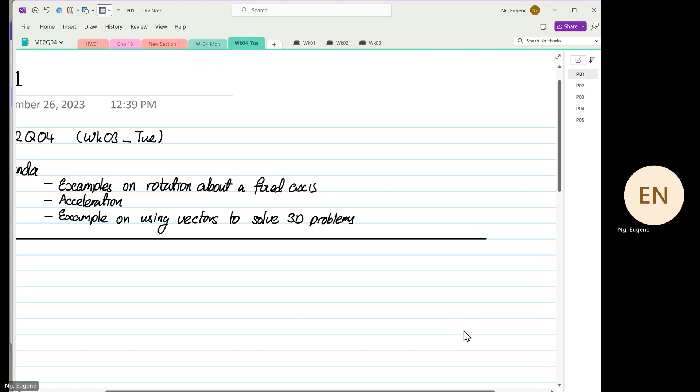And a quick reminder that your term test 1 will be held on October 2nd. It will start at 7 p.m. and end at 9:30 p.m. You're going to have 3 questions. I will notify you about your seating arrangement on Friday, which room you should go to.

3 questions, and they are from the lecture. Okay, so you need to know the lecture notes from lectures, and homework 01, homework 02, and homework 03. You should be capable of doing all this homework without any problem. Okay, yes. Yep. Homework 3 is also involved. Okay. I can add in some more formulas for what I teach this week.

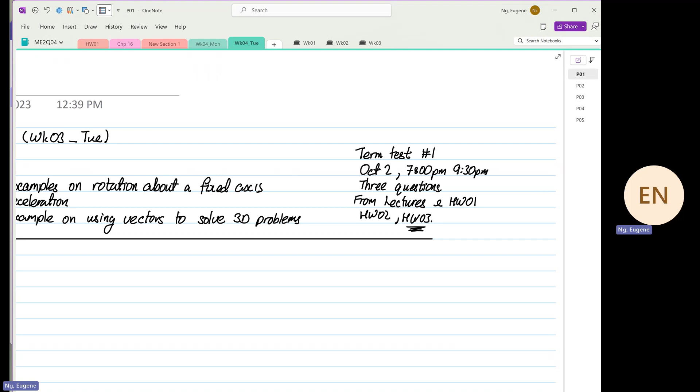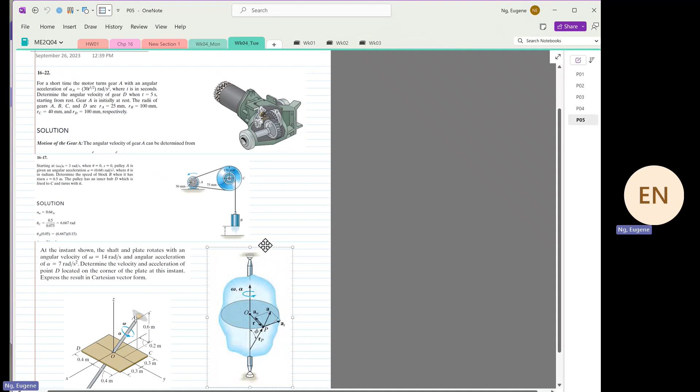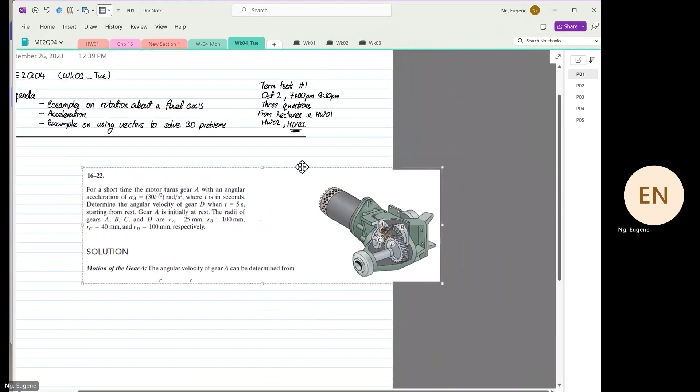Right. So we are going to look at another example, and they are posted on Avenue to Learn. So this is the next example that we'd like to do. This example is different from the previous one because I selected it since there are more gears. But more gears does not mean more difficult. Not necessarily true. Right, let's see what we have. Okay.

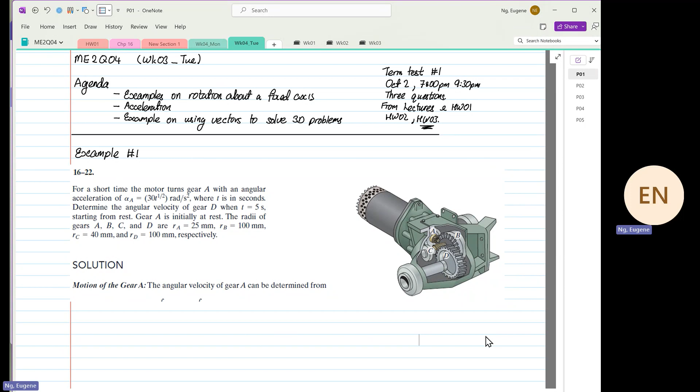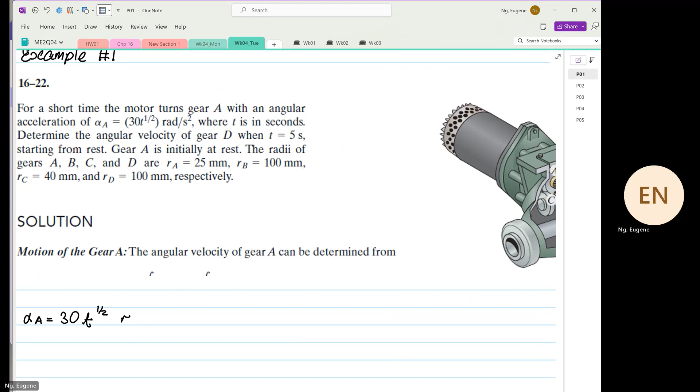So we have a short-time motor turning gear A, right? You see gear A down here in the diagram with an angular acceleration. So we know that alpha A is equal to 30 T to the power of half radians per second squared, where T is in seconds. We have to determine the angular velocity of gear D. Okay, we have to find omega D.

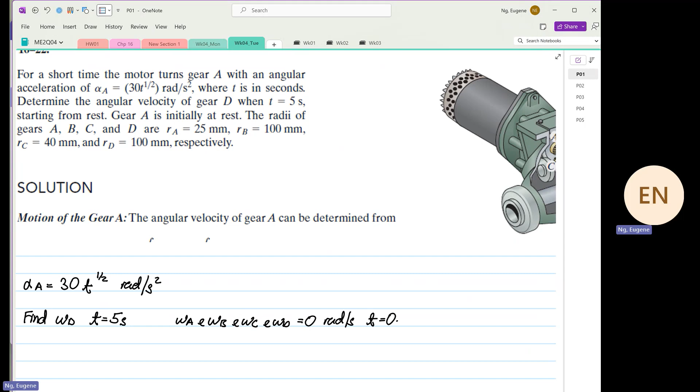We have to find omega D when T is 5 seconds, and we know that omega A, omega B, omega C, omega D are equal to 0 radians per second when time is equal to 0. Furthermore, we are given the radii. The radius of A is 0.025 meters. Radius of B is equal to 0.1 meter. Radius of C equal to 0.04 meters. And radius of D is equal to 0.1 meter.

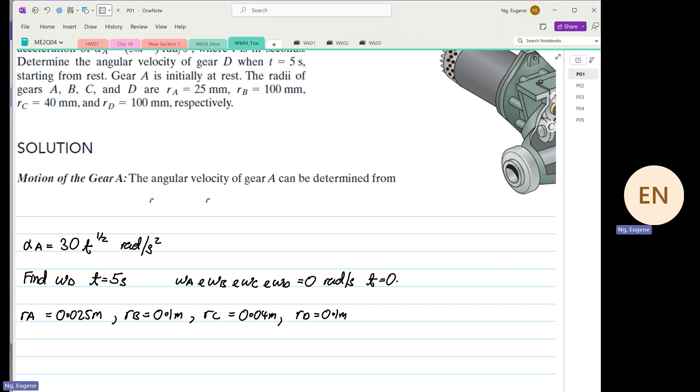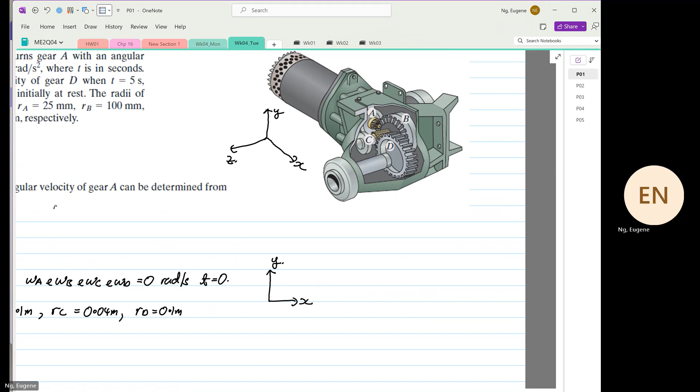Okay. So a question like that, unfortunately, they do have a lot of layers. So we somehow have to sketch and simplify the entire structure of gears. So we're going to have a transformation now. For no reason, I'm going to call this X, this Y, and I'm going to address this as Z. Just randomly. So now we are going to view this section, the structure that we're going to analyze. This is our X, and that's our Y. So our eyes that we're going to view from are over here. That's where we are.

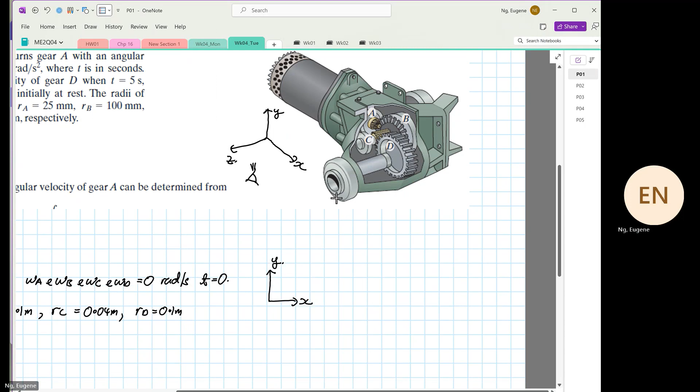We are looking at gear B and gear D. So I'm going to sketch our gears first. I'm going to go into this mode. Okay, come on. I'm going to sketch our gear B. Okay, so this is our gear B.

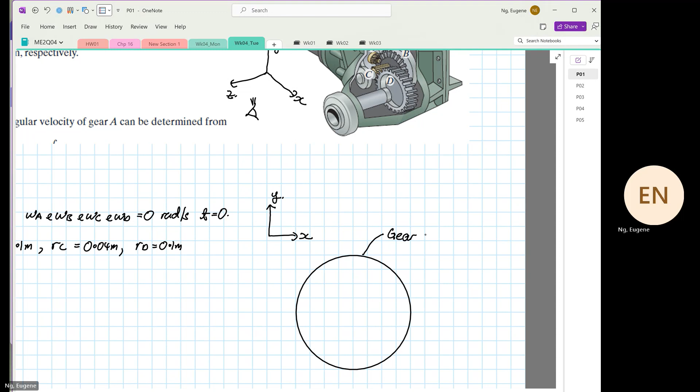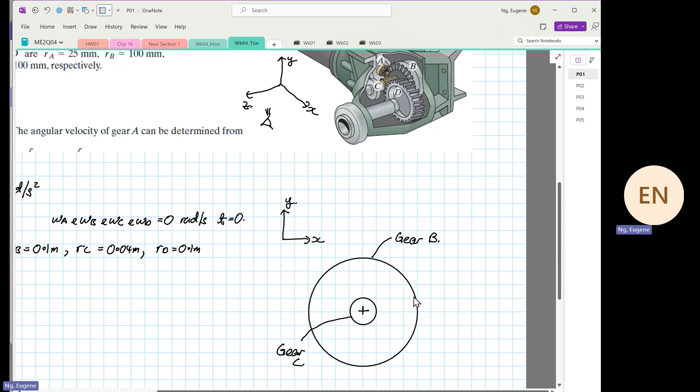And then we have our gear C sharing the same shaft. Okay, so this will be our gear C. So given that this is our gear C, then we have a gear D. And if I'm not wrong, if you look at the dimension, gear D and gear B have the same dimension. But it has been offset. Again, this is just a sketch. It has been offset.

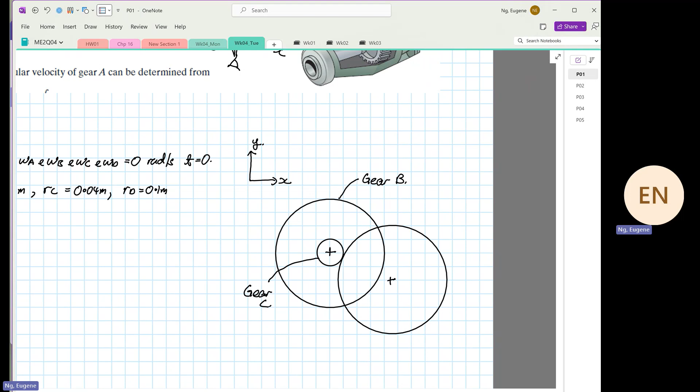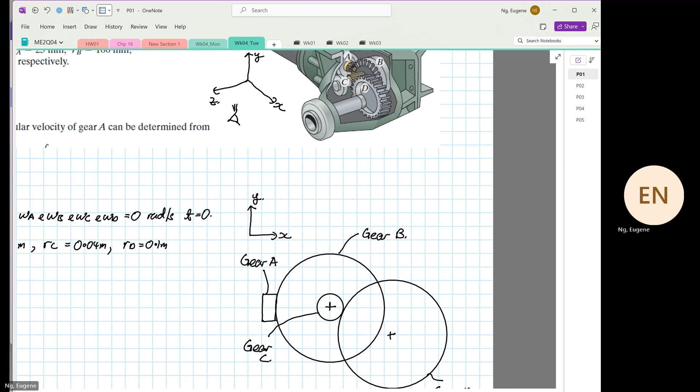And I hope this is my center. So this is our gear D. And from there, we have our gear A from that view. Just draw a simple sketch. This is our gear A. So this is a simplified sketch, which I find really useful. Useful in doing what? Why do I find this useful? Remember the topic we are teaching now. Does anyone have any idea what chapter we're teaching now?

The chapter we are teaching now is chapter 16, planar kinematics of a rigid body. So you all understand what planar is now, yes or no? If this thing is going to move, it's going to move in which plane? XY plane only. And we are just going to do rotation. Why the term rigid body? This is why: gear B and gear C are attached by a common shaft. Yes or no?

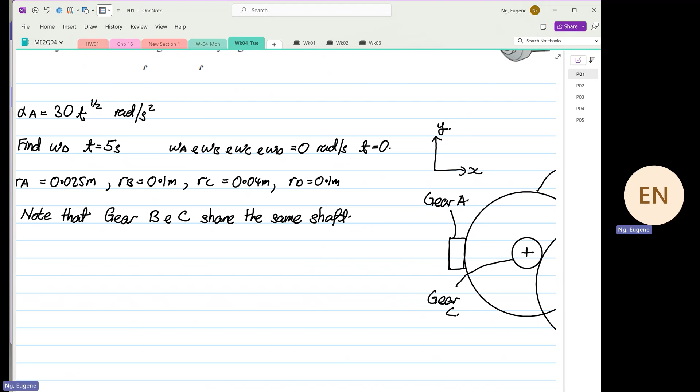So you will write this note that gear B and C share the same shaft. So when you declare that, therefore, the angular velocity of gear B is equal to the angular velocity of gear C. And we are going to assume that it is a rigid body.

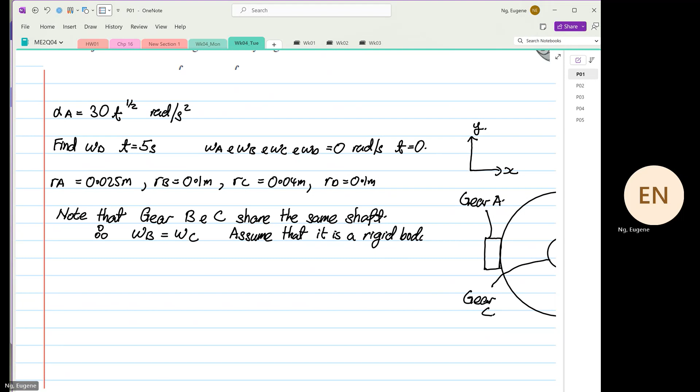Now, this assumption we make is to simplify our analysis. I repeat again, this is to simplify the analysis. In real life, they might have a bit of twist. We're going to ignore the twist for now. When we go to chapter 17 or 18, we have to consider the twist. Now, early days, honeymoon period, enjoy life.

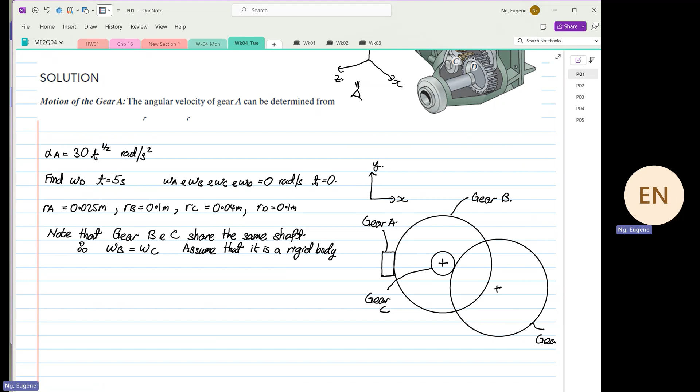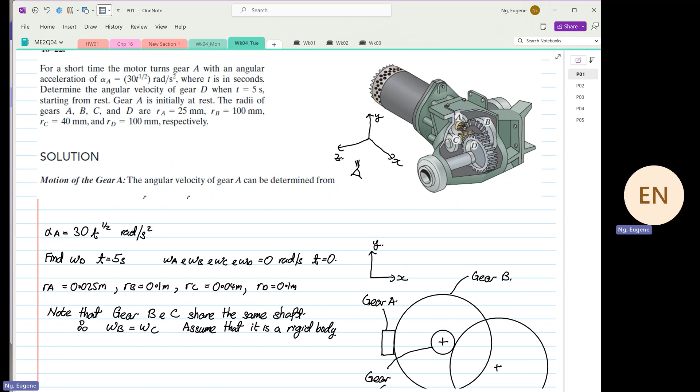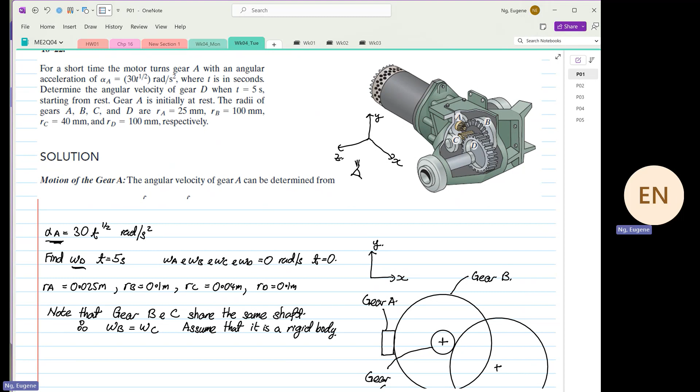So when I see a problem like this, I start to worry. When I did it the first time, I didn't know where to start. Always remember what is given to you. Given to us is alpha. So somehow we have to relate alpha to omega A. Why omega A? Because at the end of the day, we are going to find omega D. So I write down here why we need to find omega A.

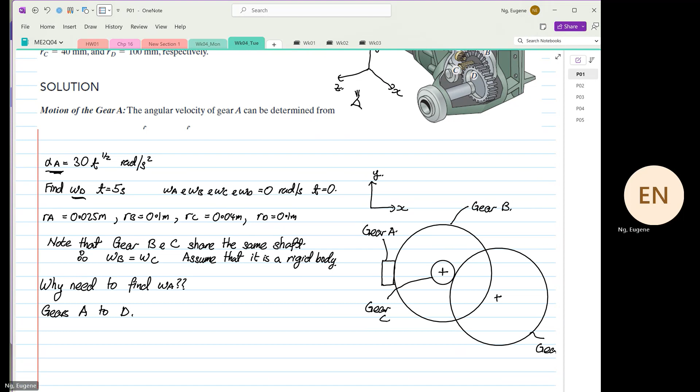So if we look at gear A to gear D, they are somehow connected. Yes or no? Gear A to gear D are somehow connected. We know that omega A RA is equal to omega B RB. Yes, we know that.

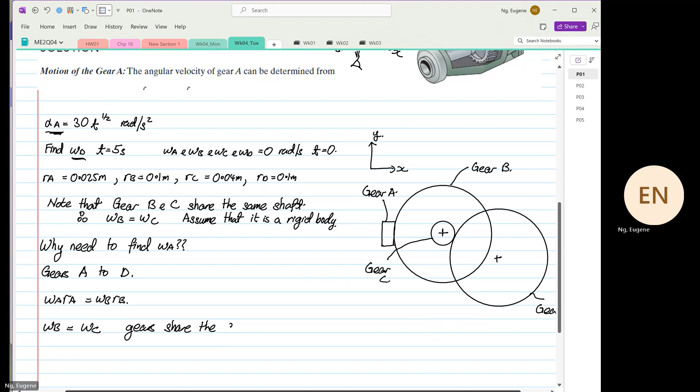So gear A and gear B are related by omega A RA equals omega B RB. Then the next relationship that we can bridge is omega B equals omega C, because the gears share the same shaft. And finally, we can also have the analysis where omega C RC is equal to omega D RD.

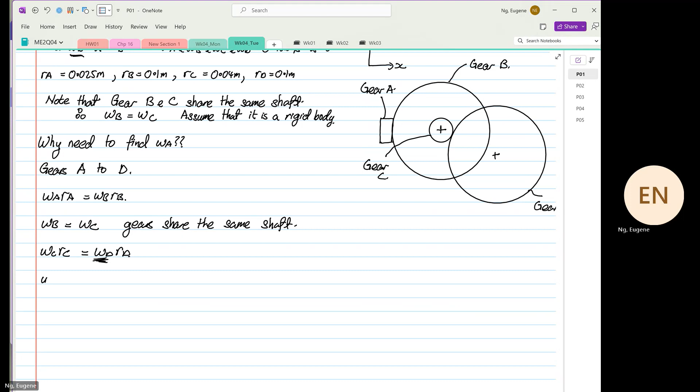So with this, we can find omega D. That is our end objective. Are we clear? That is why it's so important to have a diagram like this. And how are we going to relate our acceleration at gear A? So we know how to relate. If we look at the formula, we know that omega is equal to, so relating...